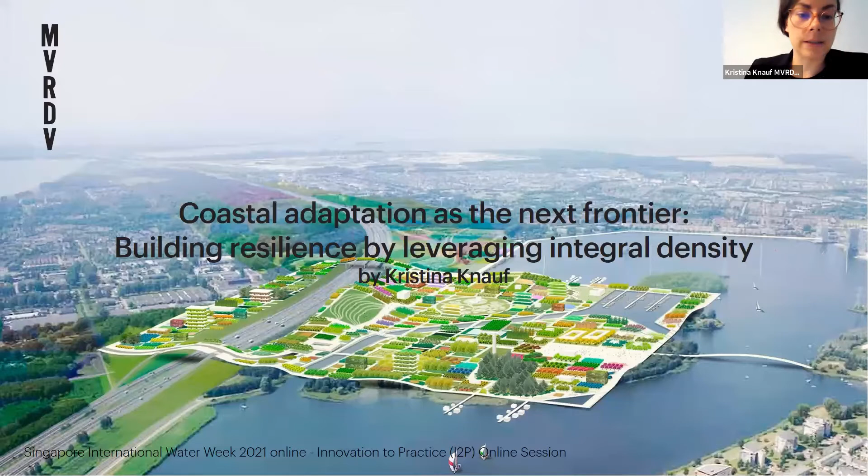My name is Kristina Knauf, Associate at MVRDV in Rotterdam. I will open today the session on coastal adaptation as a next frontier. MVRDV is a globally operating design firm with offices in Rotterdam, Paris, Shanghai, and Berlin.

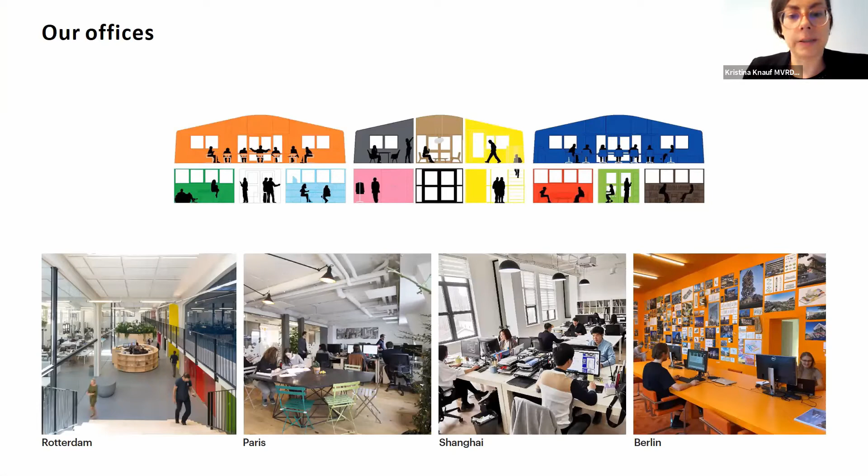We work on a broad range of scales of spatial issues and research, always with global urgencies in mind. And we do this with an in-house group of experts of sustainability and resilience, which I am part of. And we, together with our design teams and our principles for building resilience, develop concrete solutions that answer to the

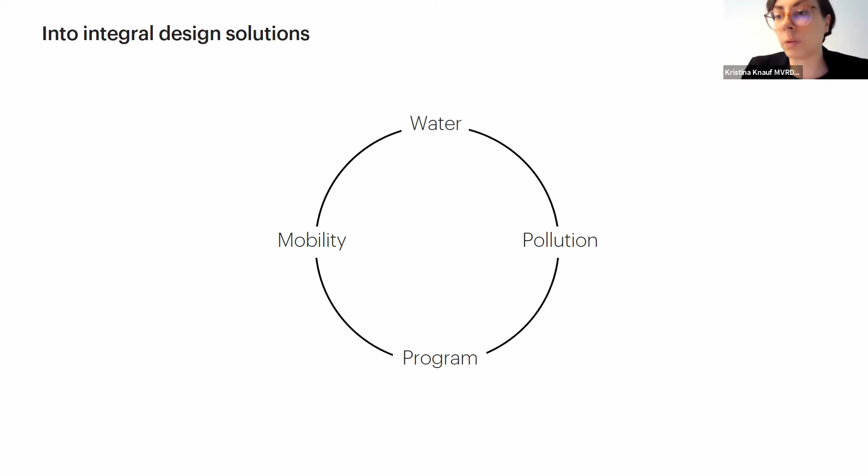UN Sustainable Development Goals. And with our methodology, we try to turn isolated thinking into integral designs that answer, for example, water issues by looking as well at urban issues that our cities are facing, such as pollution, land use, or mobility. So how can our design approach actually contribute to adapting Asian cities to water challenges ahead?

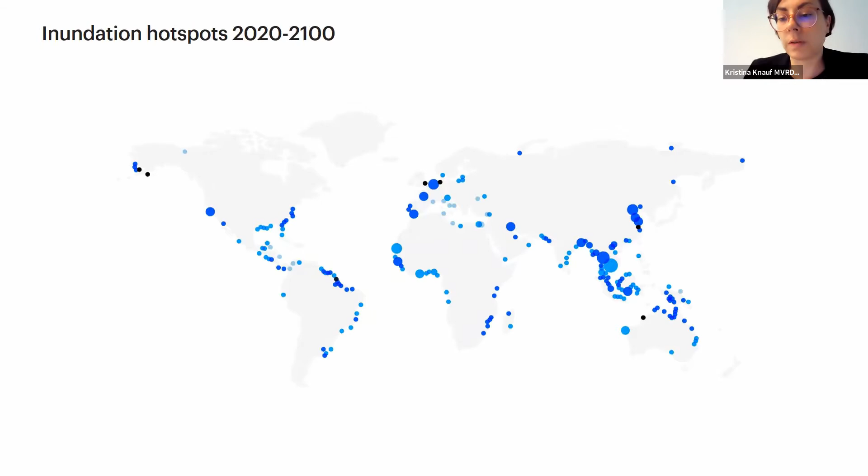When looking at coastal conditions, we see a paradox. We see that there are inundation hotspots, especially in Southeast Asia, that are very much paired with some of the fastest growing cities. And there is a correlation, of course. But the question is, is it a vicious cycle that we need to break, or can we actually use this chance of growing pressure on our urban systems to leverage this growth to adapt our cities in different ways to these

changing water conditions? So in our practice, we investigate how we can use community needs and urban pressure as driver to change the way we live with water. So while my colleagues of Blue 21 and BAM will guide you through some examples on floating developments and coastal defense infrastructure, I will show you today some examples of how MVRDV adapts existing cities to face water challenges ahead. So how do we contribute to that?

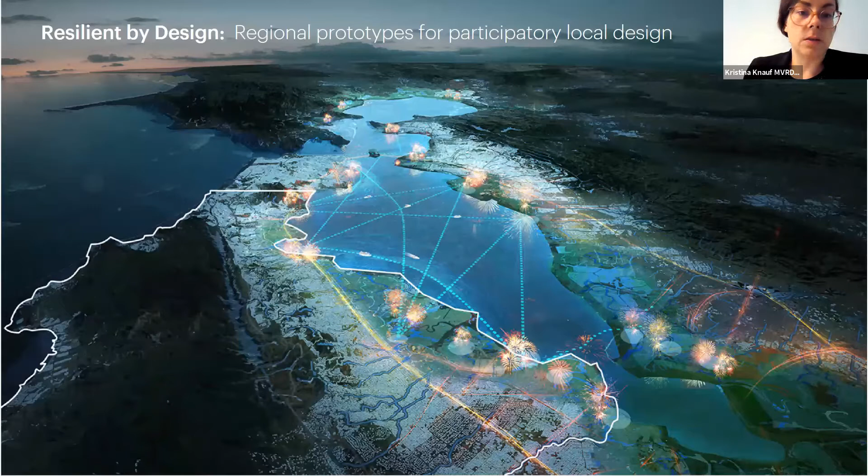First and foremost, we leverage community needs and desires to build more resilient cities. In our contribution to the Resilient by Design Challenge in the San Francisco Bay Area, we look at the whole region and the watershed system to understand the situation. And we do this first and foremost with the people that live in the place and know the situation the

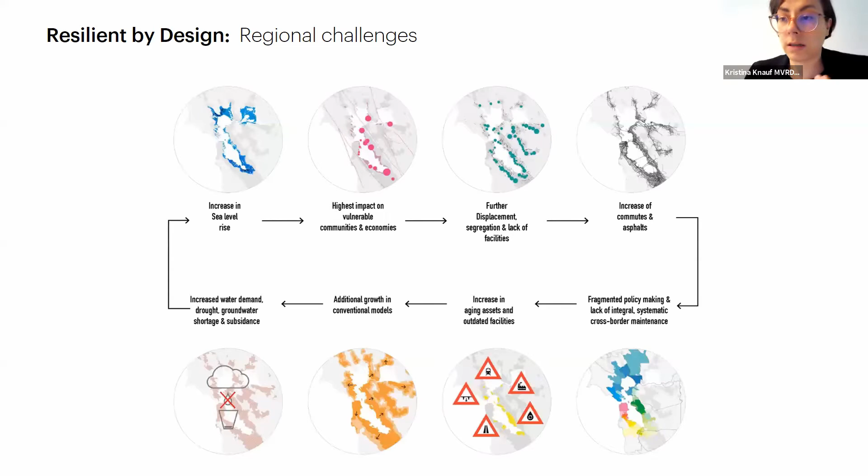best. But as well, we analyze the water system in correlation to urban issues such as mobility, social segregation, fragmented policy making in order to understand the actual dynamics in the region. And from here, in our research, we understood that the existing system is very fragile and actually needs more robust links and additional links in the system in order to face the shocks and stresses ahead.

So what we did in our design is that we developed a prototype that we call Connect and Collect. That is a public space system that integrates water cleaning and water storage solutions with new last mile mobility solutions, as well as community amenities that are lacking in the current situation.

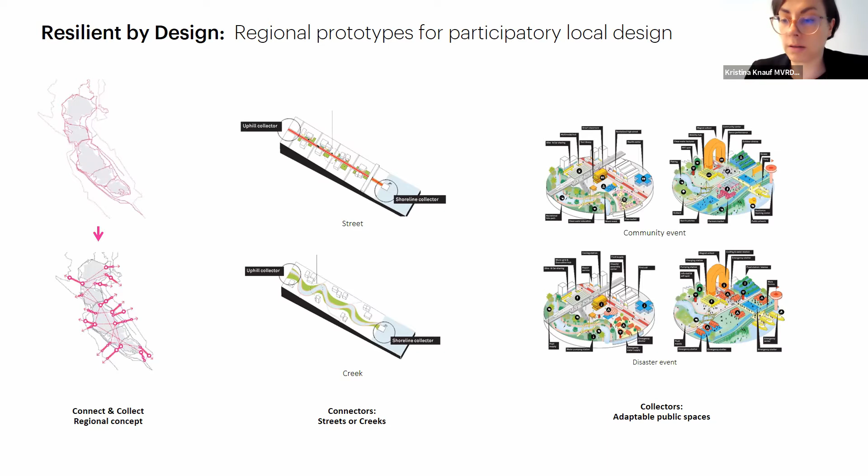And as such, we create orientation hotspots within the community that can become valuable hubs for the community to build resilience on a social level in daily life situations, but also hubs for water storage and cleaning, and as well emergency management during disaster situations. And this prototype we then customize with local communities.

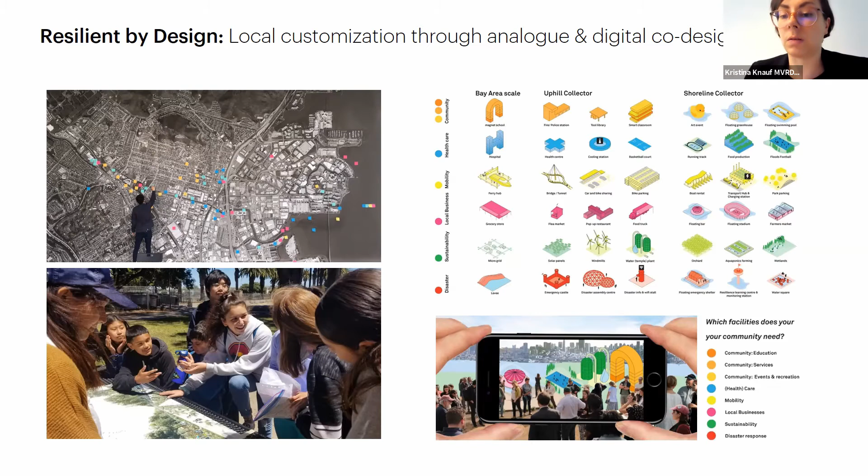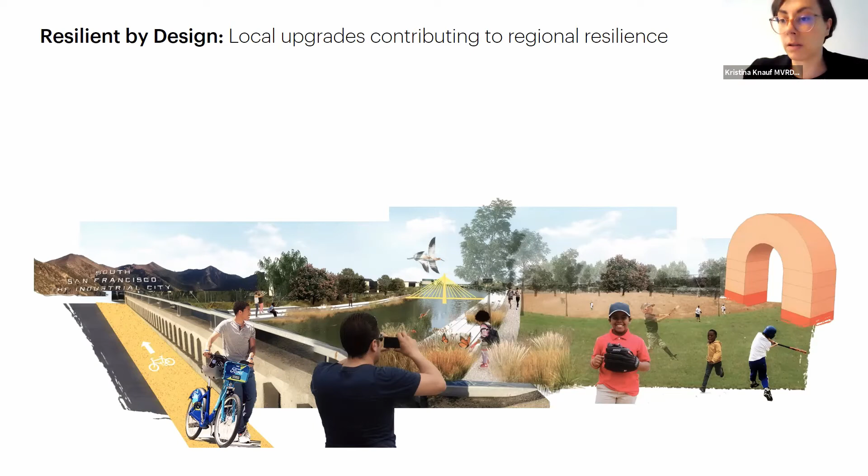In our case, we went into the community of South San Francisco and really talked with them in very analog ways, trying to distill current conditions, but also their ideas and wishes for the future ahead, and also try to develop together with them new design solutions using digital tools to not just visualize them, but also communicating them and getting feedback from the communities on whether or not these solutions could be feasible and desirable for them. So with this, we develop very customized local solutions that over time, when communities contribute, build regional resilience.

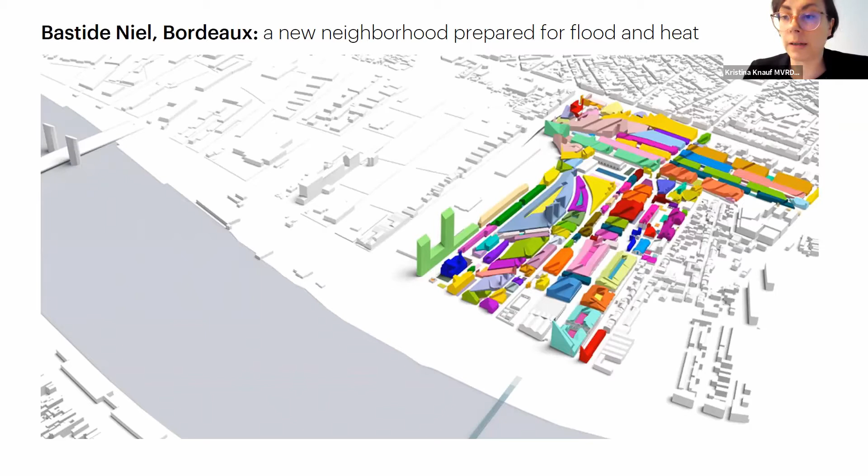Next to that, we design dense new neighborhoods that actually have a new way of living with water. In our project Bastide Niel in Bordeaux, we transform a brownfield site into a livable neighborhood within a floodplain of a river. And we do this by lifting the buildings and actually installing, like you can see on the right here, a built water storage system underneath the buildings that allows the neighborhood to exist without any harm within the fluctuating situation of the river.

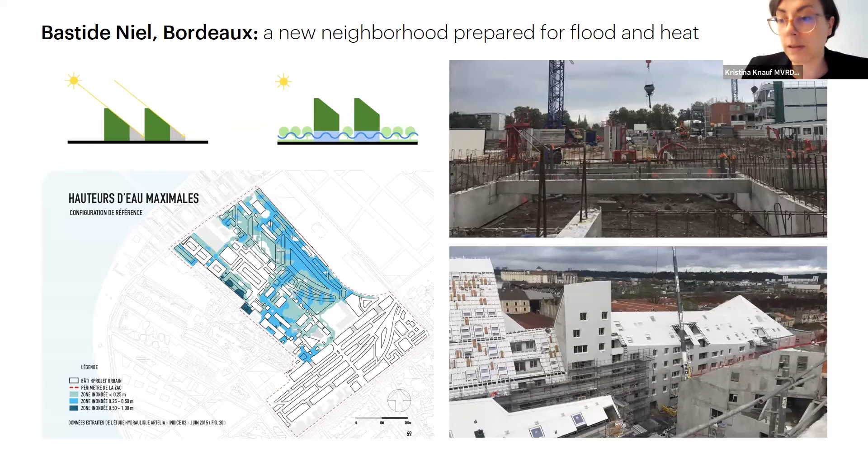And next to that, we design buildings in such a way that they also orchestrate urban shadow in order to prepare this neighborhood also for urban heat in the future to come. So in that sense, we create livable neighborhoods in symbiosis with river landscape. And lastly, we also create strategies that leverage integral development to cross-finance water upgrades.

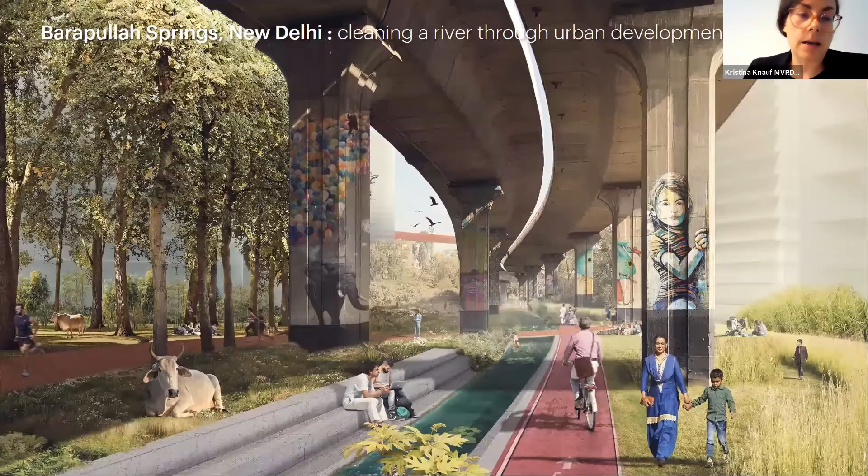In our project, Barapullah Springs in New Delhi, we actually clean a river by urban development. And we do this by strategically identifying hotspots along the tributaries of the very polluted river. And in these hotspots, we develop an urban development strategy that actually creates financing mechanisms through development that actually finance cleaning facilities of the water system, as well as public space upgrades.

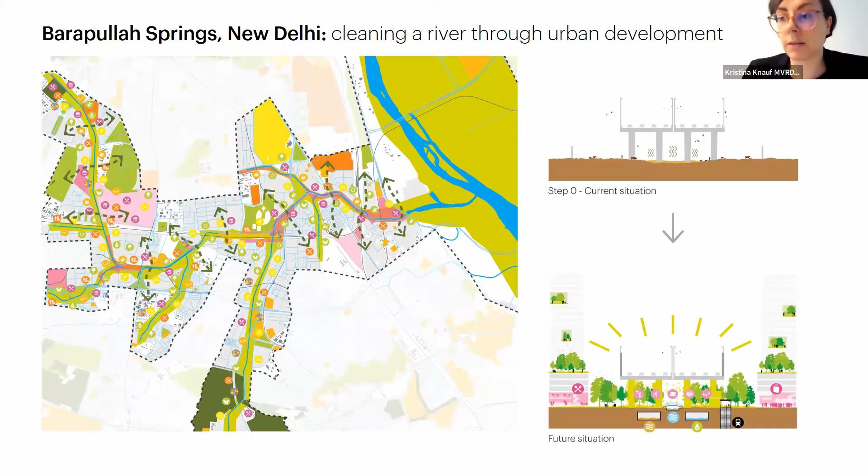And as such, they turn the current very polluted, segregated situation into livable spaces, new neighborhoods that actually also connect existing neighborhoods that were previously disconnected. So with these examples, we would like to summarize the takeaways for Asian cities that we have.

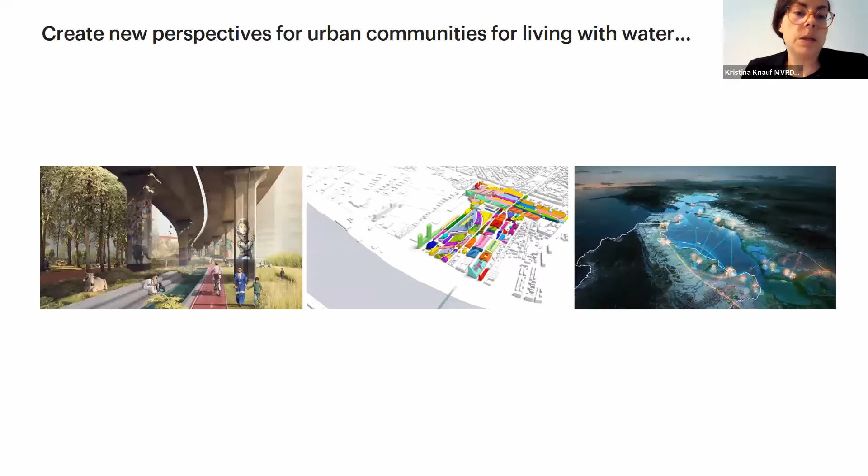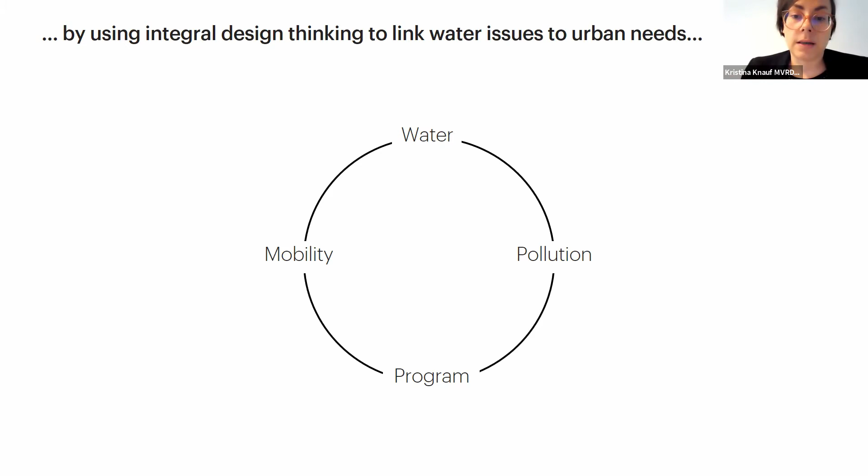We believe that you need to create new perspectives for urban communities to live with water. And you need to do this by using integral design thinking that actually links water issues to other issues that are playing in the cities right now and that the cities will face in the future in much harsher ways. And as such, together, we can build wonderful, resilient, and livable cities.

My name is Blanken. I'm the Managing Director of BAM Infra Consult, Delta Marine Consultants, and BAM Infra Asset Management, part of the Royal BAM Group. Royal BAM Group is an award-winning engineering construction firm active in the construction, property business, civil engineering business, as well as in public-private partnerships. As Royal BAM, we provide sustainable solutions across the construction life cycle, and we are recognized as a leading sustainable construction firm.

Delta Marine Consultants is an engineering consultancy firm and integral part of the Royal BAM Group. We tackle challenging engineering assignments on a daily basis, from concept phase to detailed design. While addressing the client's needs, we strive to minimize the impact on the environment in all phases, ensuring the protection against waves, storms, flooding, adapting for climate change, and, of course, rising sea levels. We deliver constructible, competitive solutions that actually work and are sustainable.

Being part of Royal BAM Group, based in the Netherlands, a company with a long history in water management and water protection, in combination with our local presence in Singapore for more than 3 decades, we understand the challenges Singapore and other countries in Southeast Asia are facing, like more frequent and heavier storms and rising sea levels. What is clear is that we have to adapt to the climate changes in order to ensure the safety of our people and to protect our cities and economies.

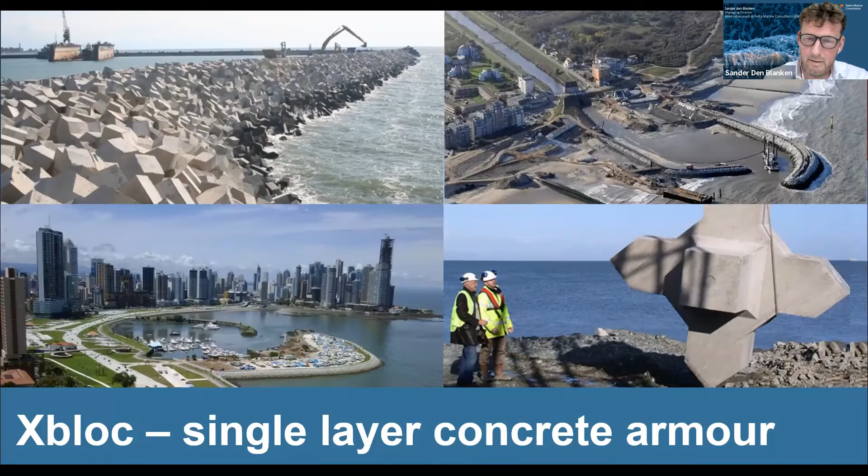Since 2003, more than 600,000 Xblocs have been placed in more than 30 countries to protect coastal communities against heavy water conditions. Xbloc has proven to be a success. Following up on that, we looked into other coastal conditions that could use single-layer concrete armor protection. The development was accelerated by the tender to reinforce the Afsluitdijk put in the market by the Dutch government in 2018.

The client asked for a solution combining resilience and aesthetics. With these in mind, we developed XblocPlus, pattern-placed single-layer concrete armor, a more economical and sustainable wave protection. XblocPlus uses up to 50% less blocks compared to other technologies. The unique form of the XblocPlus allows for quicker, more reliable and industrial construction methods. Furthermore, the elements are easily replaceable, can be reused for future projects, and visually fit into the surrounding landscape.

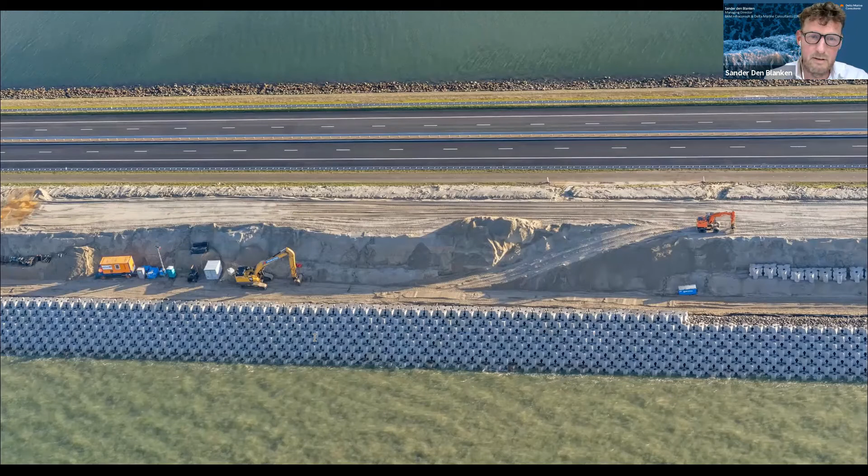As you may know, we won that bid. The Afsluitdijk renovation is going to be finished in 2022, which is next year. A layer of 75,000 XblocPlus units protect the country of the Netherlands against sea level rise. In the process, we fully digitalized the design of the elements and the molds.

After the success of the Afsluitdijk, we applied XblocPlus in coastal resilient projects in Poland and La Réunion. The interest and demand for XblocPlus is growing rapidly. Many other clients see it as a solution to shield their communities and properties from unpredictable weather conditions.

The journey is far from over. We keep innovating with the Xbloc family towards more sustainable, economical, and climate resilient projects. We have our own water laboratory to test new ideas in specific circumstances and wave conditions.

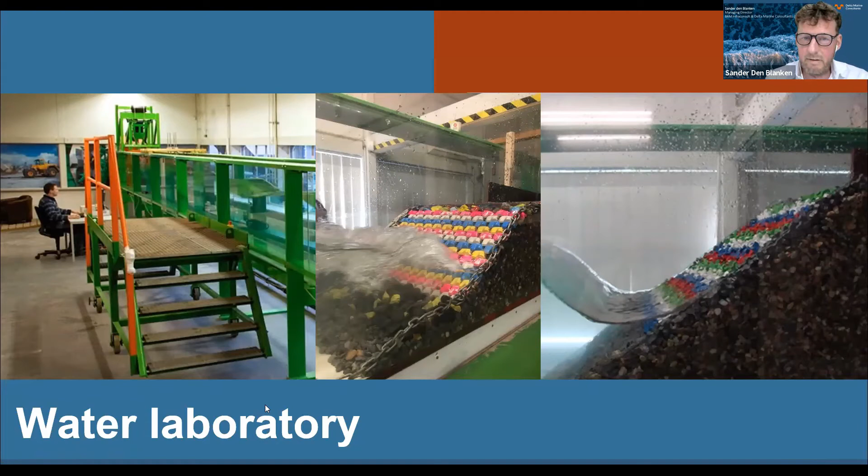A particular field of interest for us is shore protection in moderate wave climates where conventional rock armor is still commonly applied at a high environmental cost. Rock extraction and transport from the quarries over long distances bring about a huge carbon footprint. We see locally produced concrete as a more sustainable and economical alternative.

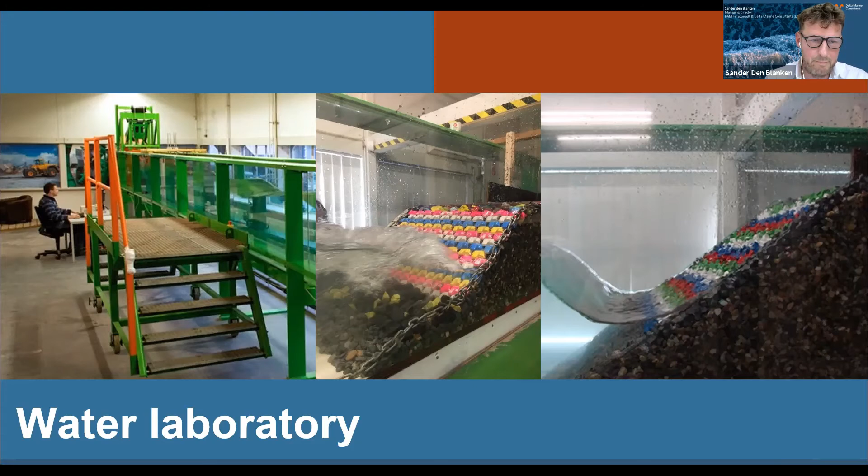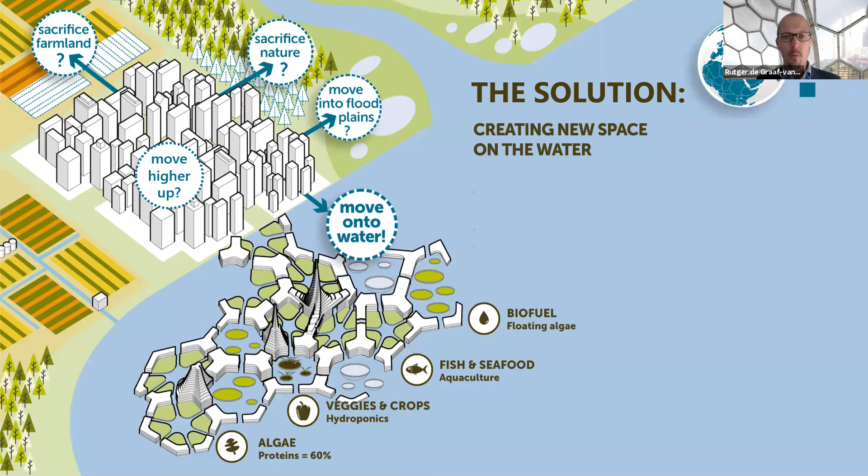Moving higher up, urban densification can solve part of the problem, but we think the water, 70% of our planet, can create what we need to deal with these challenges. Water provides a space for growing cities, but also for floating biofuel, floating cities, aquaculture systems, and hydroponics. So it's not only about living on the water, also food and energy provision on the water. We see floating cities not as autarkic, self-supporting, isolated things, but really as a symbiosis between cities on land and water.

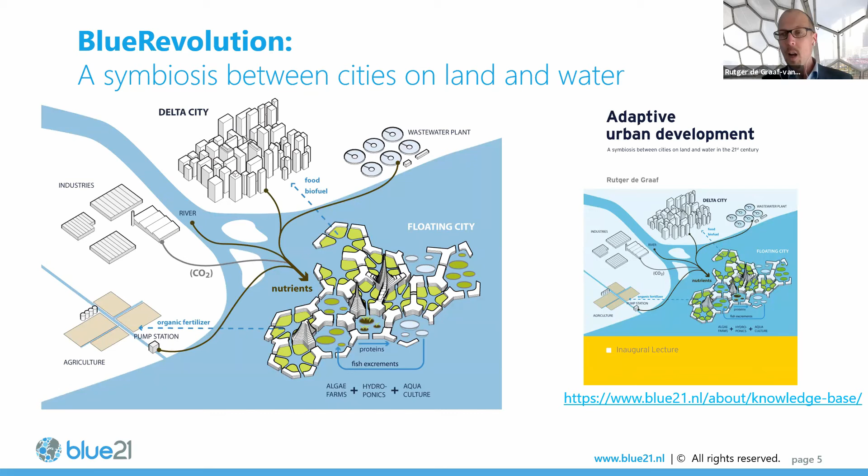We see the floating cities utilizing waste nutrients, CO2 and heat from the cities on the land, and use it in a productive way to create algae systems, food systems, and aquaculture. And by doing that, we create a symbiosis between those two systems.

We also see floating cities as part of the 5 capacities of resilience, as very recently we have proposed this together with Henk Ovink. Threshold capacity is building dikes against flooding. Coping capacity is how do we deal with flood? How would you reduce damage? Recovery capacity, how can we recover after a flood?

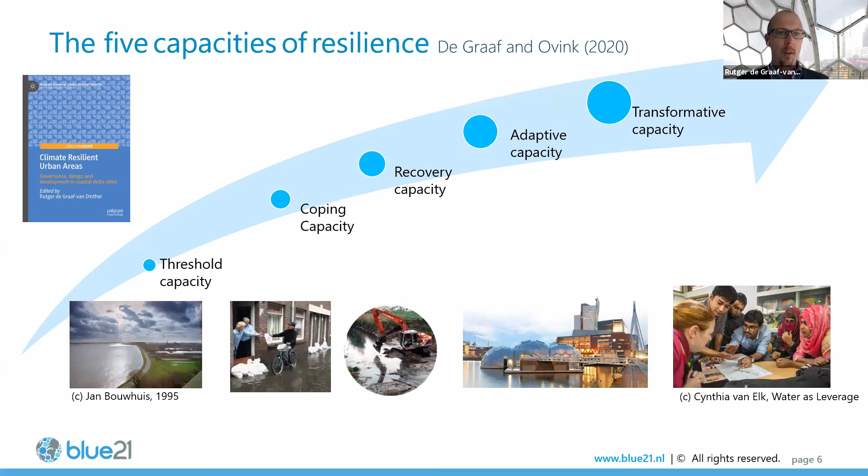Adaptive capacity, how can we adapt to the uncertain effects that we're facing, such as climate change? And transformative capacity, how can we address the root causes of climate change, but also transform our society? And we think floating urban development can be a very interesting part of these 5 capacities of resilience.

There's a growing momentum of floating solutions. Living on water has become part of the blue route in the Dutch National Science Agenda. Also, UN Habitat has convened a high-level roundtable to talk about the solution for climate adaptation. In 2020, we saw the 2nd World Conference on Floating Solutions in Rotterdam, and we launched the largest open source knowledge base on floating urban development.

Space at Sea, a Horizon 2020 research program commissioned by the European Commission on large-scale multi-use floating platforms, was finished last year. And even this year, also some really interesting milestones. Floating urban development was mentioned in the joint statement of the 1000 Cities Adapt Now program. And also the Global Center on Adaptation is moving to a floating office.

Floating cities is not something of the future. The building blocks are there in place. It's proven technology. These are all projects that are out there. They're realized. It's not a futuristic thing, but the scale is lacking. So we aim to increase the scale of floating solutions. How do we do this?

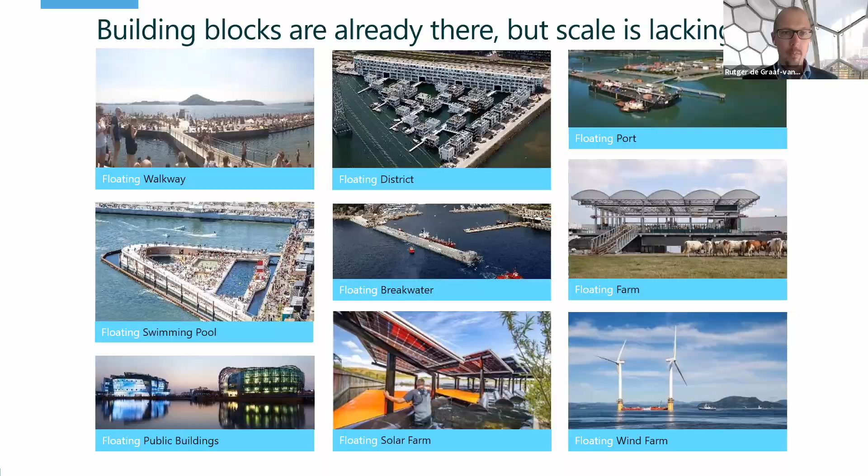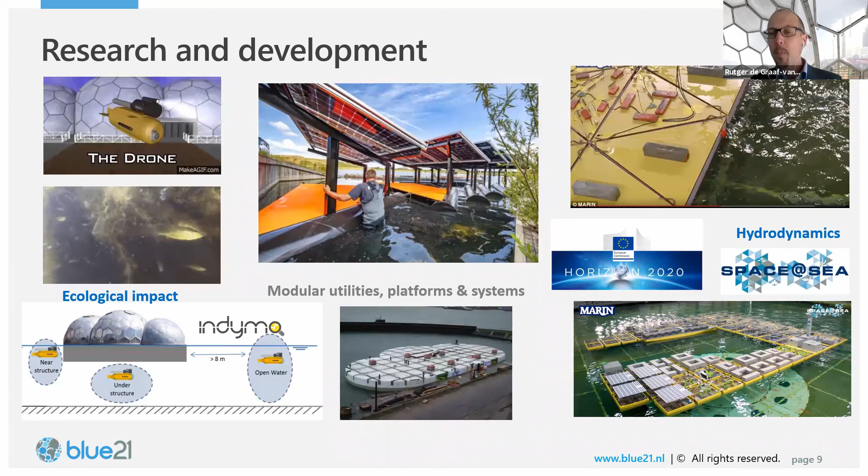And we're working on this project together with the Shimizu Corporation, a really large contractor from Japan, but also with the Angry Birds investor, Peter Vesterbacka, who is the initiator of this tunnel project. And we work together with him to also create the floating islands.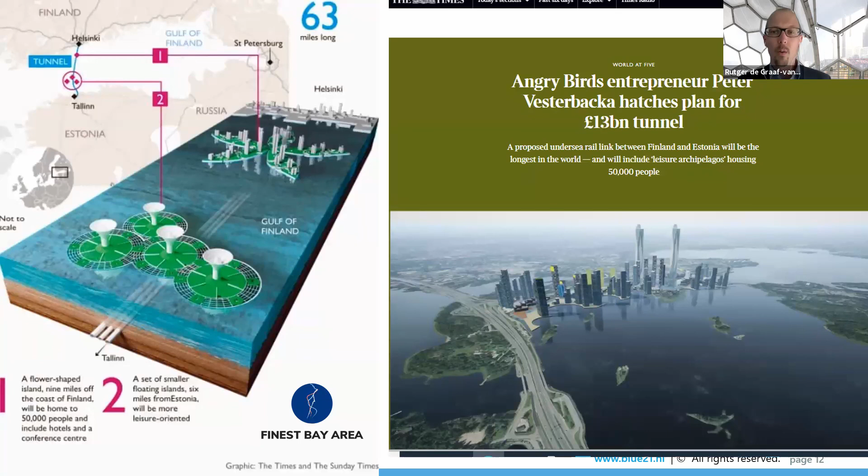At the moment, 2020, 2030, we're in coastal areas. That's our vision at the moment, creating floating urban development near shore in old port areas. But as technology further develops in the near future, 2040, 2050, it will become possible to create floating cities in the middle of the sea. These floating cities would be surrounded by floating algae systems to suck out the CO2 from the atmosphere so that we can both adapt to climate change, but also address the root causes of it.

This is what I wanted to share with you today.